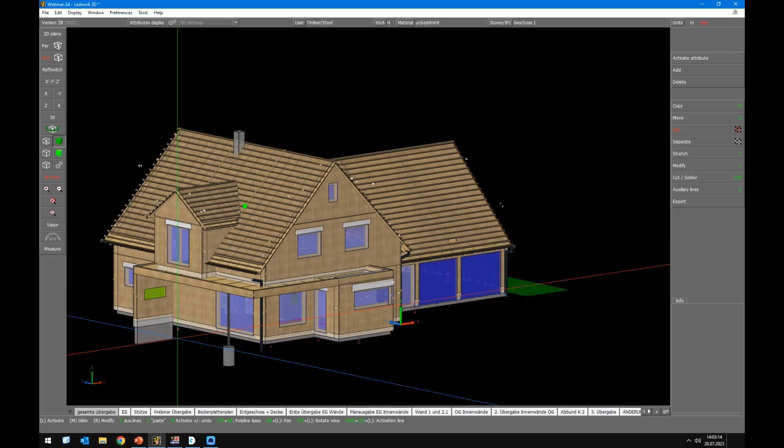Okay, to get an overview, I show you the model in cadwork. This is a single family house, let's check the basement here. It's made of timber frame walls, and here we see the floor, with the bearing beams and floor beams or ceiling beams.

As you can see, the ceiling beams on the real image are supported on these bearing beams, on the down beams, but the architect or building constructor wanted to have the bottom edge of the beams on the same level. So it was decided to lift the beam a bit.

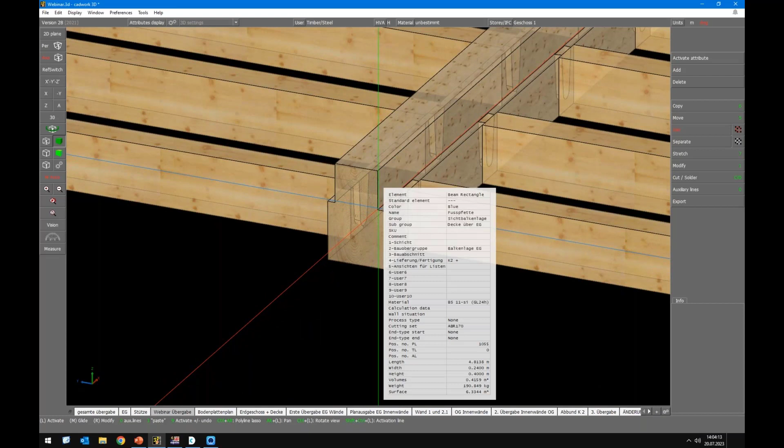You can see it here. So the ceiling beams are connected via dovetail connection, and the bearing beam will be a bit inside the ceiling structure. Otherwise, we would get less stiffness, so it was decided to lift this up a bit. Maybe not so good for acoustic reasons, but the building constructor decided to have it bottom to bottom for floor and bearing beam, for this downstand beam or flush beam, however you call it.

Okay, you can export the file via the IFC interface, for example, or via the DXF interface. We will also be able to export it the old way, what we had in RFEM 5, via the DSTV interface. This will be available soon.

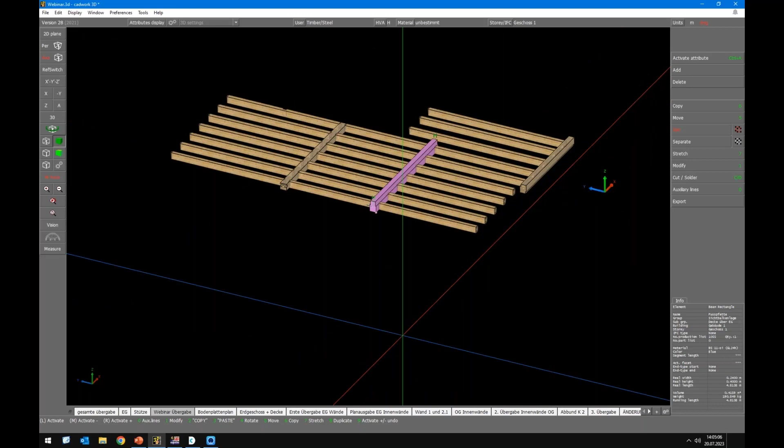But because of time reasons, I will not show you the import or export today. I start directly with a finished model. If you are interested in the import export via the IFC interface, maybe it's worth watching the German webinar done on Tuesday, but because of time, I decided to skip this part in the English one. If you're interested, just check the German one - even when you don't understand the language, you will understand the pictures and how it is done.

Okay, so we have imported all members already, and I have assigned the hinges. So we have 3 one-span beams, and here we have our bearing beams.

We have here the staircase. So let's go back here. There's the staircase here, and that's why we have these cantilevers here. Actually, we have everything finished.

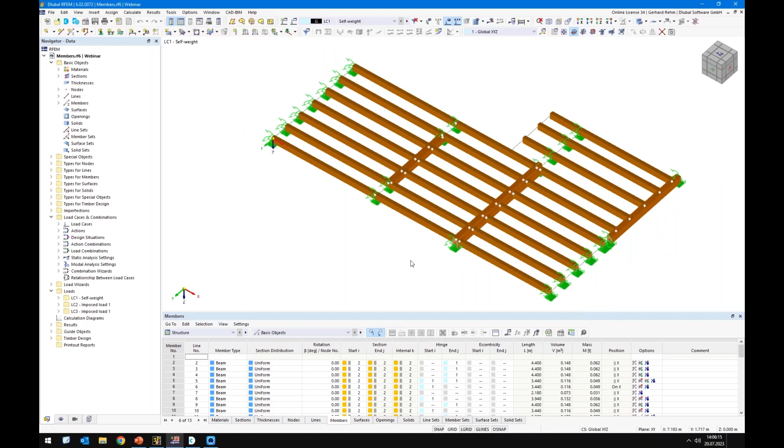I decided to create just one support with a few springs to avoid that the beam rotates around its own axis, so it keeps it simple. I'll switch to the top view, and I have already created 3 load cases: load case 1, load case 2, load case 3.

We will apply the loads now. There are 3 ways to apply loads on these floor beams or ceiling beams. The first is the manual member load. The second is the member load from an area load, and this is what I'll show you today. We will not use it in the end, I'll delete it afterwards, but there's a new feature inside and I want to show it to you.

We apply here 2.5 kilonewton and I will select the geometry by picking these nodes. We simply click OK.

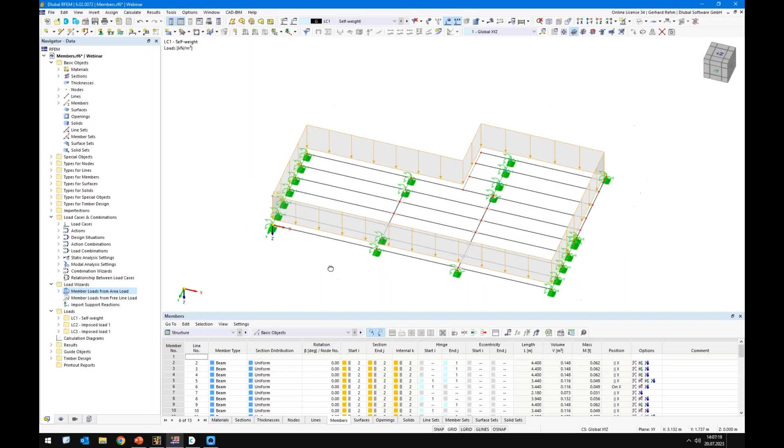Let's start with this view. So this is our area load. When we display it separately, we will see how the loads are distributed to the beams. Let's focus, for example, on this node here. You can see there is this linear distribution and there's this node load.

Sometimes it was hard to understand how the distribution works, or from which tributary area this load comes. Here in the display navigator, under load wizard, you will find this option to display the distribution areas. When you activate it, I'll deactivate the nodal supports for a better overview. When you select the node, you get these colors here, and now you can perfectly see the tributary area. This nodal load or nodal force comes from this area.

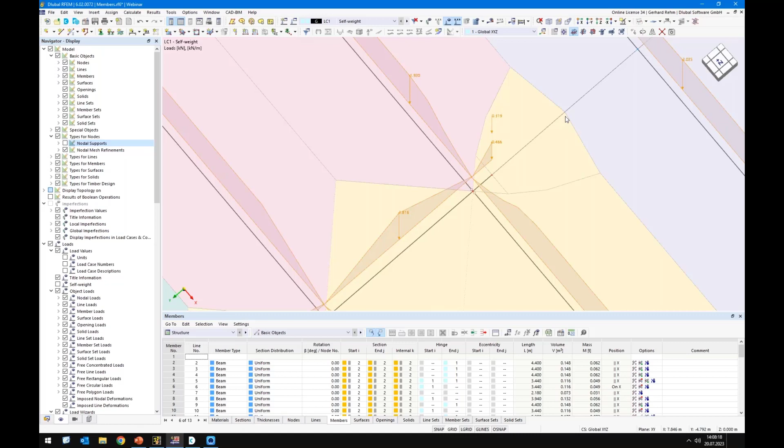In the background you see these Voronoi cells, which are used here for this approach. I guess it's really handy for a better overview and understanding of the approach. Of course, if I go to the load again and say please remove all beams which are parallel to the bearing beams, then we get our typical distribution, what I want to use here now, and also the Voronoi cells.

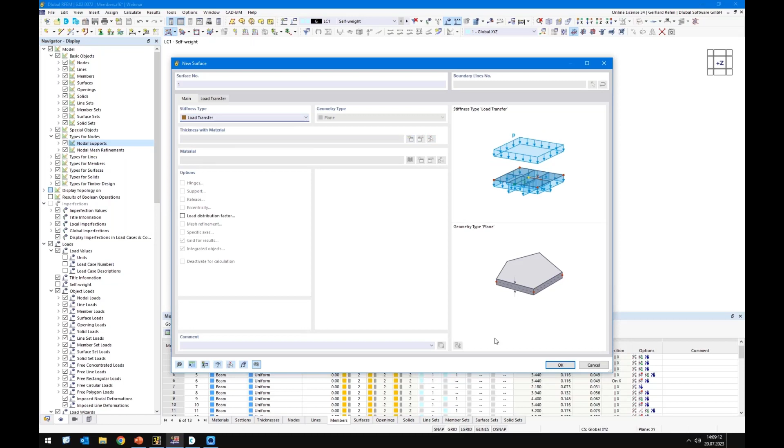But as I mentioned, we don't want to use it here, that's why I delete it, because we want to use the surface, the load transfer surface. This means we will create a new surface by selecting boundary lines, and switch the stiffness type over to load transfer. Now I need to select all these boundary lines.

Let's have a look at the local axis system. Here we go. Reverse local axis system, I want to have it downwards. I was a bit confused. Okay, we see the local y-axis goes parallel to the global y-axis, meaning perpendicular to the ceiling beams.

That's why I'll switch over now in the load transfer to the Y direction. I want to distribute it via the Y direction to all members. As we can see here, we have nodes which will also be loaded, and these nodes are located exactly at this location and this location, same as we had before in this load wizard.

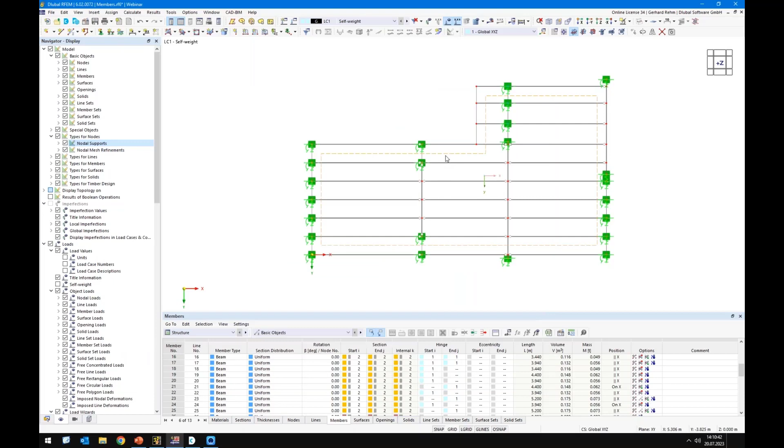That's why I don't want to use it. I copied these numbers and inserted them directly here. Otherwise we would get small node loads at these locations, and I want to avoid that. We can switch off the local axis system again, and now let's load it.

We will apply an additional self-weight of 2.5 kilonewton per square meter, that's from the ceiling structure. When we right-click the surface, we can display it separately, same as for the load wizard. That's actually exactly what I want to see.

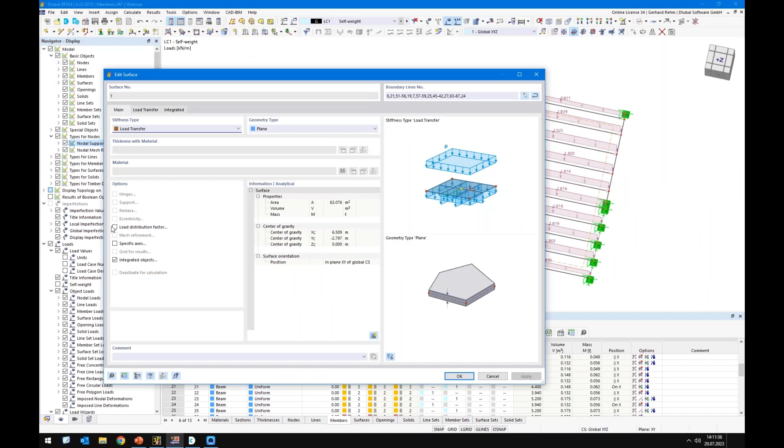But remember there was the staircase here, and on the left and right side we only consider 50% of the load because the surface is only modeled until this location. Of course, I could extend the surface by another 50% of the spacing, but in this case I'll show you another new function called load distribution factor. I activate these factors, and now I can assign to this member, and also to this member, to consider the load by factor 2.

And now when we check it, it's 0.9. When I hit the OK button, it becomes 1.8 again. Okay, that's self-weight. Let's switch over to imposed load.

Here I want to consider it per span because afterwards we want to check continuous floor. We have 3 times a one span beam, and afterwards it will be a continuous beam. That's why I directly loaded with load case 2 on the first and third span, and load case 3 is for the intermediate span. In this case I cannot use surface load because the surface is not divided here on these lines, but I can use free loads, in this case free rectangular loads.

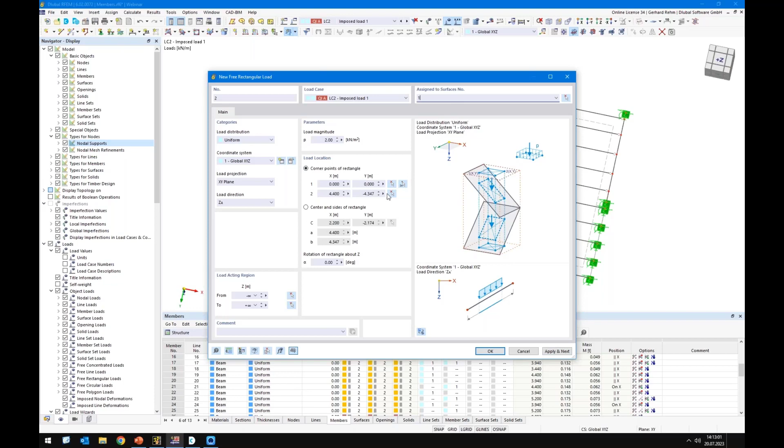So it's for surface 1. And I select the area from here to here. I click apply and next. Of course we need a magnitude, in this case 2 kilonewton per square meter. And again for the third span, to zoom in a bit, here we go, and click OK.

We will see the distributed loads. Switch over to load case 3, and in this case we have this corner, so we cannot use the rectangle load. We will use the free polygon load. I will select the corners. Also 2 kilonewton per square meter on surface 1. Yeah, and that's it.

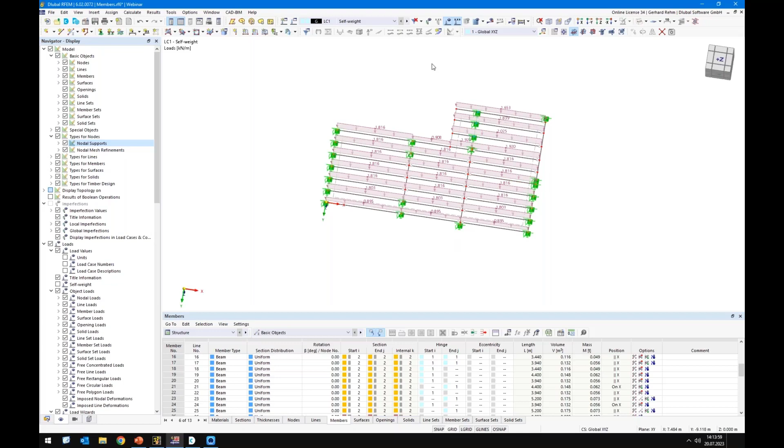Before we start to design the floor, we will check, for plausibility reasons, if everything is correct. So I run the analysis now only for self-weight 1, and let's check the deformation, moment distributions, and so on.

I'm not interested in the nodes and the support reactions. Let's check the deformations first. Maybe colored, it does not matter. So it looks good, and this is exactly what I expect.

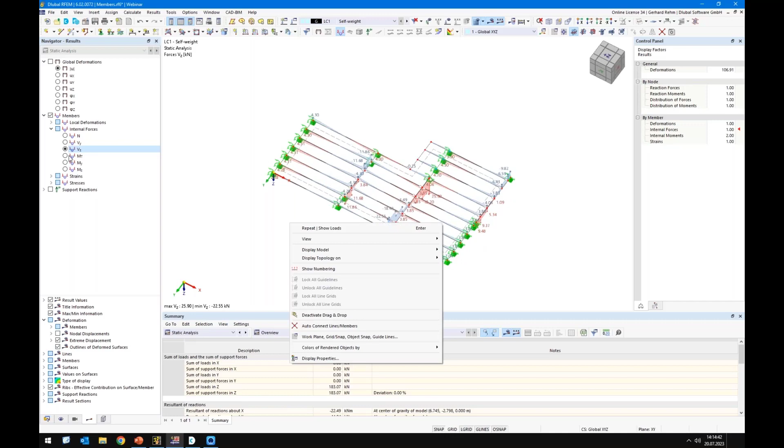Let's switch over to internal forces. We should have no normal forces inside, no shear forces in Y direction, of course in Z direction. That makes sense. And no torsional moments, that's also good. Bending moments look like for every one span beam, that's okay.

Here we have our hogging moment, which is also fine on this cantilever. Okay, looks good so far, and now we can start to think about the design.

Let's check, for example, this floor beam first. So when we come to design, we need to think about, okay, what about stability? Is there any problem with stability? I mean, for this floor, of course not.

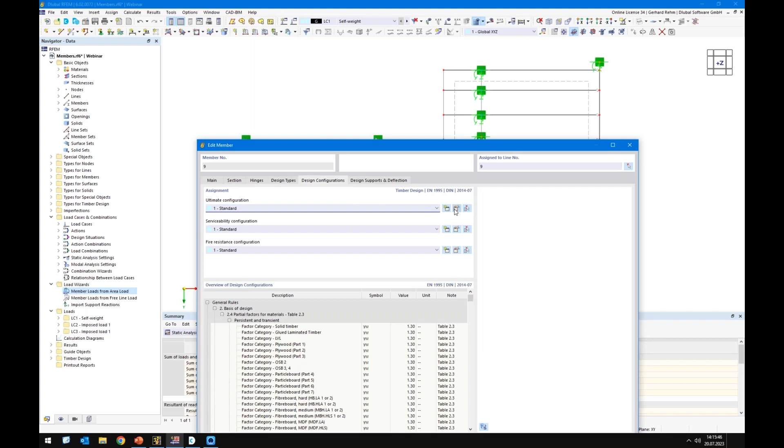We have no normal forces. We have really slender, or non-slender cross sections, so lateral torsional buckling is also not a big deal here. That's why I go to the ultimate config, which is assigned to all members, and I will switch here to do not perform stability analysis, so then I can get rid of the buckling lengths.

For serviceability, it detects the reference lengths like for the member length. In this case 4.40 m, which is okay. So that means I don't have to do anything for the floor beams, but for the downstand beams and also for these beams here and for the cantilever.

Because right now, if I would design this beam as a single member, I would get a reference length of 2.18 m, which is of course not wished. We should use a reference length for the SLS design of, in this case, 3.44 m. And this we do by combining these two members using a member set.

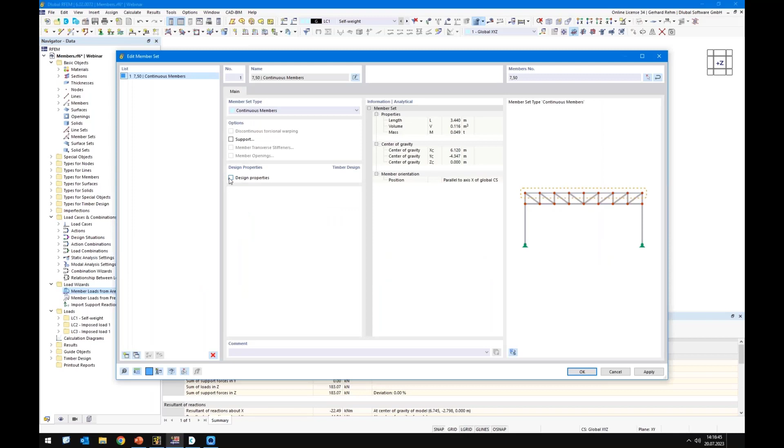I want to overtake the design properties, so the design properties are not on the member anymore, they are now on the member set. When we check the design and deflection tab, we will see now we get a reference length of 3.44 m, which is okay. So we will additionally create member sets for the downstand beams.

In this case I will create also 3 member sets, and for this member set and this member set we will do exactly the same. We activate the design properties. We have a reference length of 2.90 m for one member set and 3.33 m for the other one.

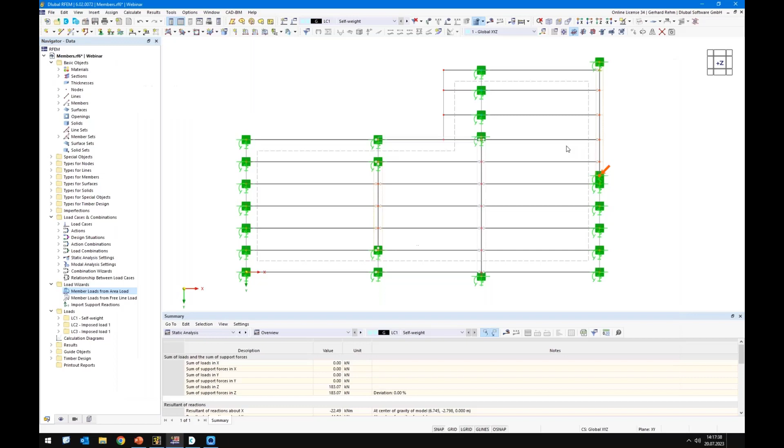Let's have a look on this beam here. Here, of course, we get really high load, and that's why I also add some design supports. So the reference length is still okay for the serviceability check, but I want to check the bearing area, meaning I want to check the compression perpendicular to the grain. That's why we need to create a design support.

So design length is 200 millimeters. And in this case, it's not an inner support, it's an edge support. And the KC90 factor needs to be selected here. In this case, for GLULAM, I select 1.75.

And that's it actually, but I want to mention these two new options, shear reduction and reinforced elements. So the first one is ignoring the shear force in a distance from the support edge, in a distance of member height from the support edge. That means we will use the relevant shear force for the design.

So this is nothing else than we have really high compression perpendicular to the grain inside. That means it increases our shear strength. And that's why it's okay, of course, only when the load comes on from the top side. In this case, I cannot use it because the load actually comes from the bottom side. But if the load comes from the top side, it causes some compression perpendicular inside the beam, and this will help to increase the shear strength.

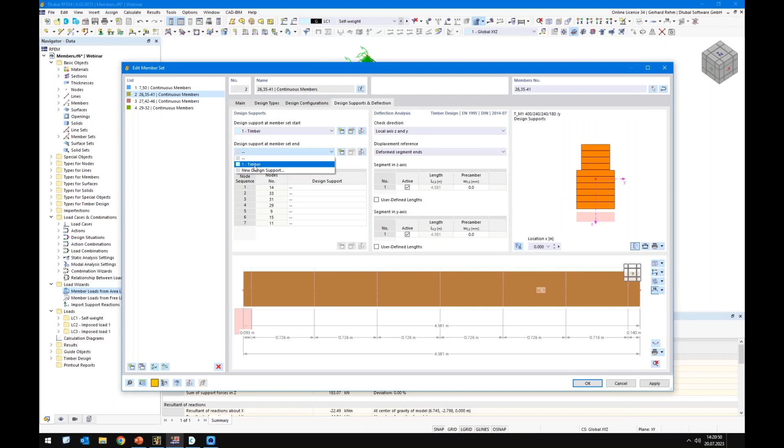Okay, oh, I need to create it, of course. So 200 millimeters and 175, and also at the other side. Okay, that's it.

We need to do the same for the cantilevers here.

So when we check the lengths, the reference lengths, it would be considered with 5.20 meters from member start through member end. Of course, this is not the wished behavior. We want to check this here with a reference length for cantilevers and this for beams.

So in this case, we need to create segments, and segments can be created by using some design supports. In this case, I don't want to check compression perpendicular to the grain. That's why I'll switch from direct support to indirect support, meaning I will switch off the direct support option here.

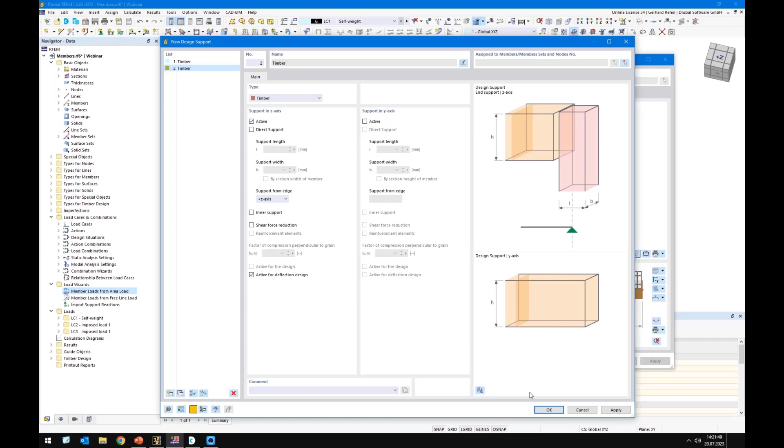Then no design is done for compression perpendicular to the grain, and it detects this tiny node here, and I want to apply it to the intermediate node also, of course, not at the member set start or member start.

Yeah, and now we will see when we check, for example, only the z direction, there's one segment for the cantilever with 1.26 and another segment with 3.94 meters. And these reference lengths are used for the design. And since there is no support here, the program automatically detects that this must be a cantilever.

Okay, good. I think so far that's it. We can run the analysis. Oh yeah, that was the wrong button. I clicked analysis for load case 1 only and not for all.

Oh, maybe good to see that I want to explain something more about the timber design. So we will switch to our timber design. We want to check ULS and SLS. In this case, I guess I have chosen the German annex.

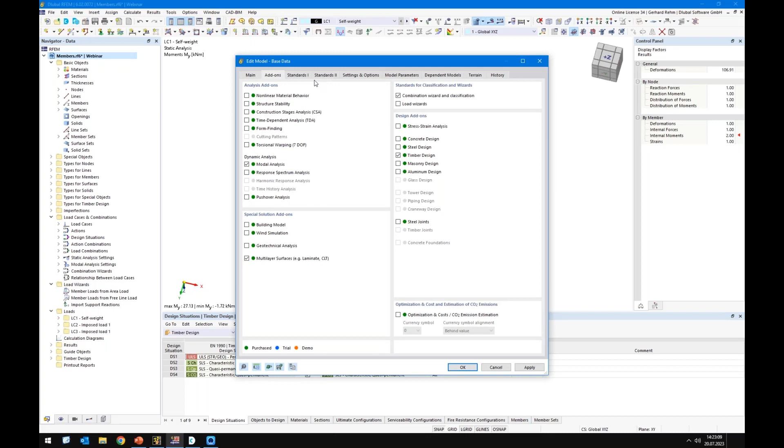I'm not 100% sure now, that's why I check it again. Yeah, it's the German annex, but of course you know you can select your annex according to your country. Okay, so in this case we check ULS, SLS. We have characteristic, quasi-permanent, and a mixture of characteristic, deformation, and the creep parts of the quasi-permanent one.

Objects to design, okay, all member sets and all members, but you see we will get some invalid members. When we select it, we will directly see the invalid members are members without design properties, because the design property is here in the member set.

So to get rid of any warning message at the end of the calculation, I insert here only the list of all members, here of all member sets, and of course the surface, that's a load transfer surface, cannot be designed, that's why I switched it off here as well.

Materials, okay, it was taken over here, GL24h for the glulam beams and the C24 for the ceiling beams. Okay, when we go to sections, we should think about the sections here.

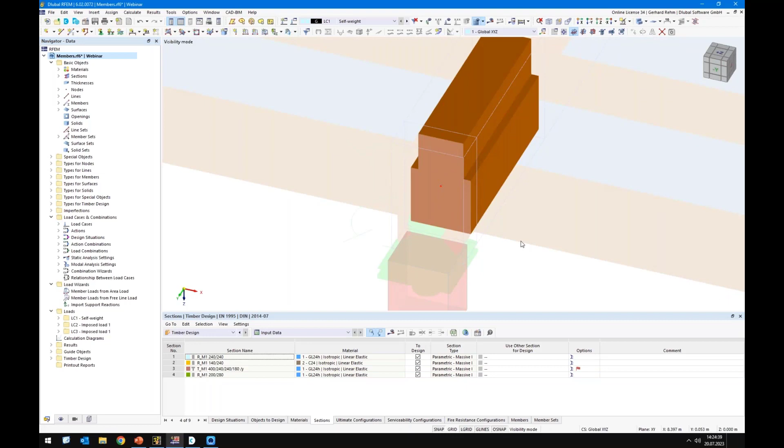Here, this is this inverse T-beam. When we check it in the model, I create a visibility and use this inverse T-beam here. But when we think about the connection, we have these notches here coming from the dovetails.

In this case, it's better not to consider it for the ULS design. For SLS, it's not a big deal because it's reducing the stiffness slightly, but the influence is so small it's not worth discussing. For ULS, however, the influence is significant, and in this case we need to reduce it.

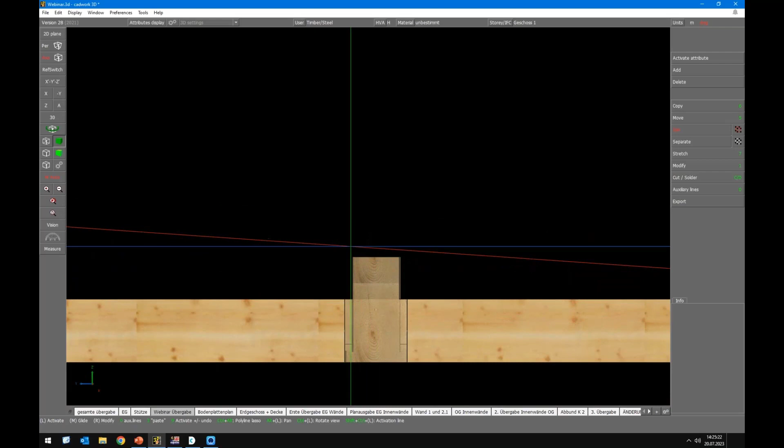That's why I will directly use here a rectangle section, which is 180 by 400. This is from this edge to this edge. We can directly use this by selecting the option use other section for design. So for the left side, it was this one.

240 by 240, and this one is, I guess, 180 millimeters on the top side. Yeah, it doesn't matter, I guess it's the case. 180. Okay, so we click here and replace the 240, the width, with 180. And here I will also use 180 by 400.

Now we have considered the notches as well, and we can be sure that the ULS check is correct. Okay, then let's start the ULS check and the SLS check, of course.

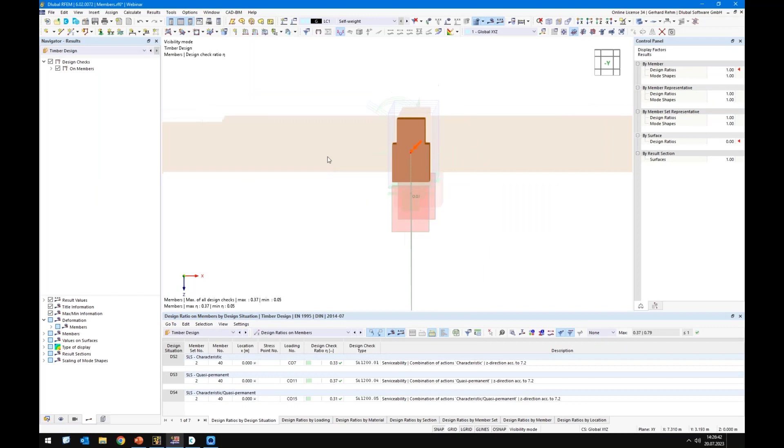Okay, we get the results for our load combinations. Let's cancel the view, and now we see - oh, maybe I forgot something.

Wait a minute, please. I forgot to assign a config to the member sets. Of course, member sets should also have a ULS config. Otherwise, only a serviceability design check is done, and this is what we don't want.

All right, so sorry, I need to run the timber analysis again - of course, not the internal forces, but the timber analysis. Okay, and we see here...

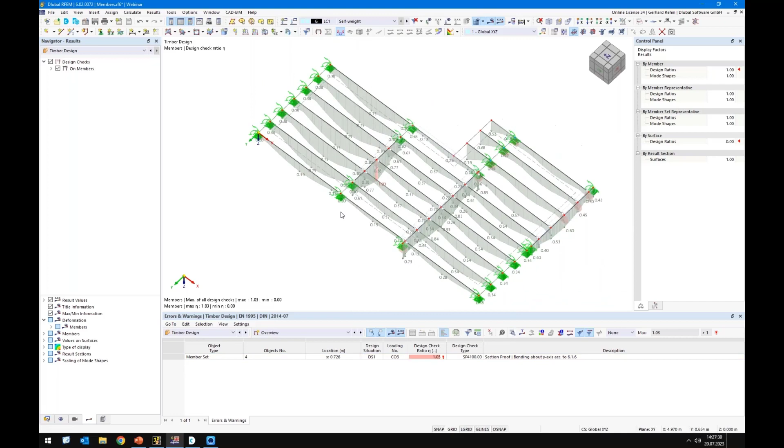Our ratio graphically. We see here on the bottom in the table directly - okay, there is one beam which causes some problems.

Maybe let's start with the ceiling beams. Okay, so we will get the maximum ratio - let's focus on this span here of 75%. We can check it separately for ULS, which is around 60% ratio, and for SLS, it's around 75%. Okay, that's what I expect.

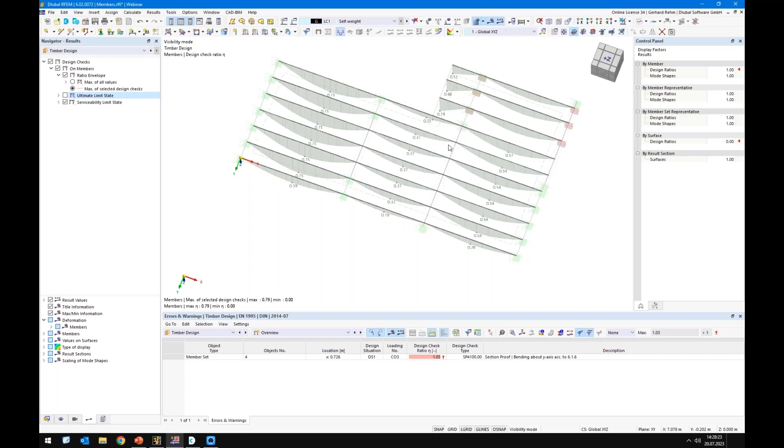We only see the ratio here. The ratio is affine to the deformation. Especially here on the cantilever, you see directly the ratio affine to the deformation. So we can confirm that everything is defined correctly.

All right, maybe let's go to the next object. In this case, let's check this T-beam here in minus X direction.

Okay, and what we see here is a ratio with some jumps. Yeah, of course, the first part from here to here is governed by shear, and from this point to this point, it's deformation or bending, and here shear again.

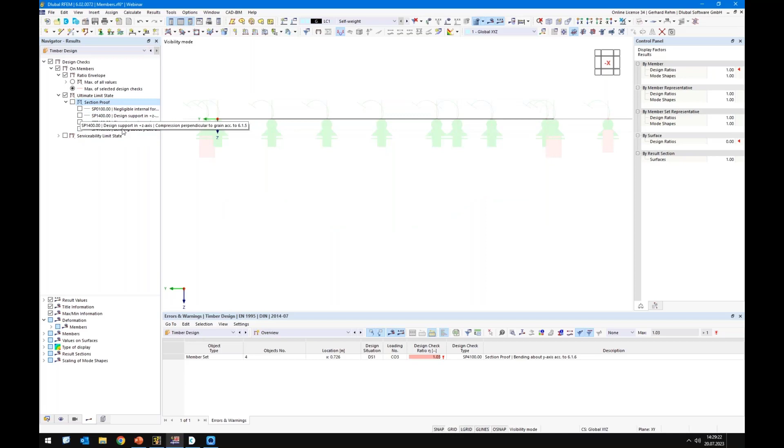But if I'm interested in more detail, I can switch off ULS and all checks, and check it separately. So for example, I want to check only bending, and I get the ratio only for bending, or only for shear - it follows the shear force distribution.

So I also get the ratio at only one X location because of the support bearing resistance. So when we switch to the input and switch to the design ratio on members, we can see - okay, we have compression perpendicular to the grain.

Maybe let's open this design check, and here you can see what is done. You see the whole equation, the whole stuff from the code. We have our support length of 200 millimeters extended by another 30 millimeters. So you can follow every value in detail, or every intermediate value, which helps you to prove your calculation.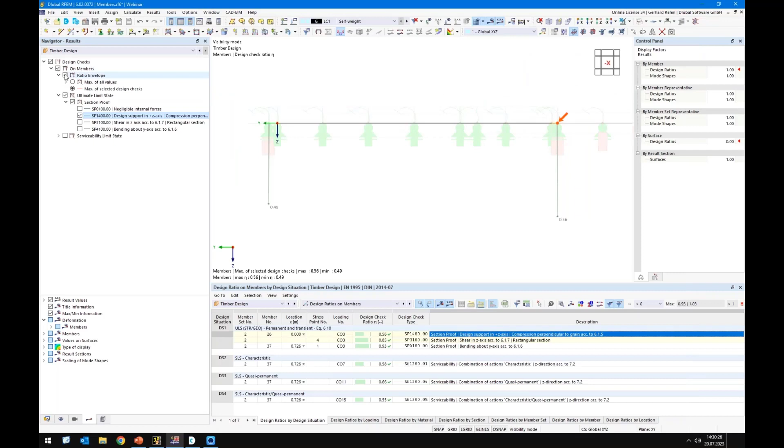Okay, additionally, if you are interested, maybe we can do it in the ULS.

You have the option to deactivate the ratio envelope, and then you will get three different ratios overlapping each other. So the first one is design 1200, 01, 04, 05. Here you can see which ratio it is from which combination.

Okay, let's activate again the max of all design checks, the envelope. We can see here we have a small issue because of bending, but especially on this location, we know it's a small glulam beam with 240 by 240.

And when we know that the reference strength of the EN 14080, the glulam standard, gives us the strength for a reference height of 600 millimeters, so we are far away.

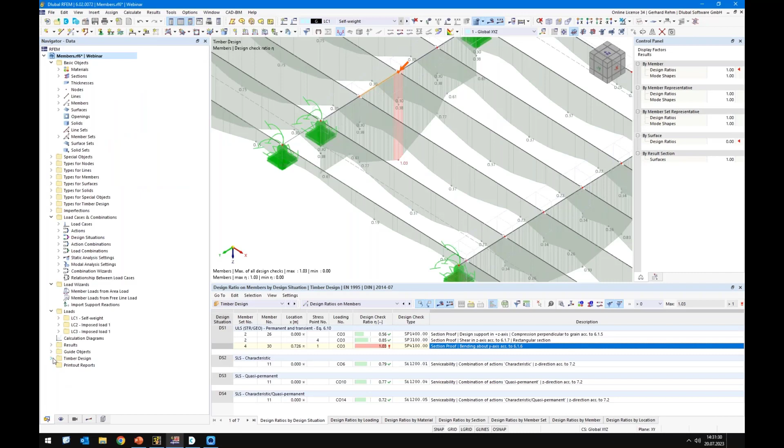That means we can use our KH factor, our size factor, which can be considered here in the ULS config. Here you can activate this KH factor according to Eurocode 5, chapter 3.3. And now we can increase the strength up to 10%, so 24 by 1.1 in this case, because the beam is so small.

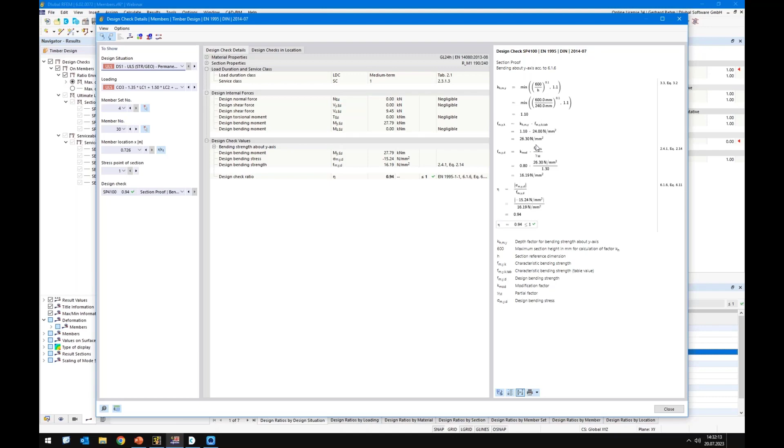Okay, now we get a ratio of only 94%, which comes from bending. Let's have a look inside. Okay, and we will see here, this is the KH factor, and 1.1 by 24 equals 26.3. So actually we have proved the floor, it's okay according to ULS and deformation.

Of course, for floors we need to check vibration too. Yeah, that's a big topic, maybe leading or controlling. For this floor, maybe when we have time at the end, I will show you the vibration design check. If we don't have time, I will refer to our website.

On the website, under support and learning, you will find videos, and here you can search for vibration. When you scroll down, you see this video, and here I show you in detail how you can proceed with the vibration check. Let's see what about the time at the end, and then maybe I can show you something as well. If not, I refer to this video.

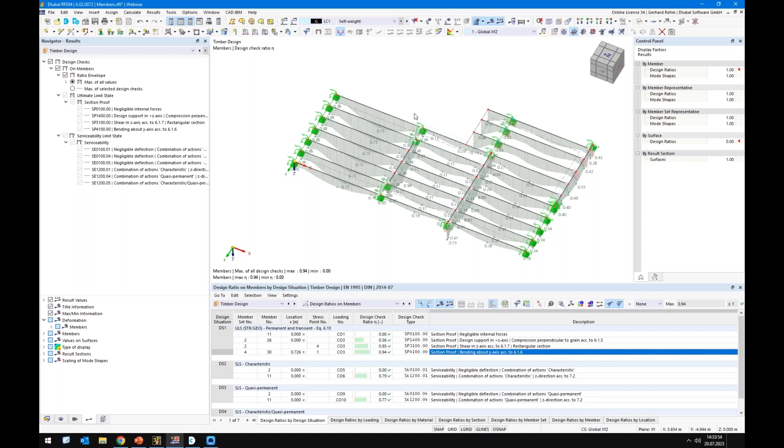Okay, let's say vibration design is fulfilled, and we call the carpenter, for example, and give them the cross sections. On the next day, they call again. The architect or the building contractor called us, and they want to have maybe not a wooden beam ceiling, maybe they want a glulam ceiling, or a cross laminated timber ceiling. That means for us, we have to redo the whole stuff, but of course we want to spend as little time as possible. How can we proceed in this case?

So let's think about glulam floors or cross laminated timber floors. Of course, it would be too uneconomic in this case using one-span beams here. That means in this case we have to use real downstand beams, which are underneath the beams. So we need to think about the cross-section height, especially since we don't have much height in the floor. When we have at least, let's say, 2.50 meters and the downstand beam has already 400, then only 2.10 meters are left.

And of course, this is less. So in this case, we need to keep the downstand beams as small as possible.

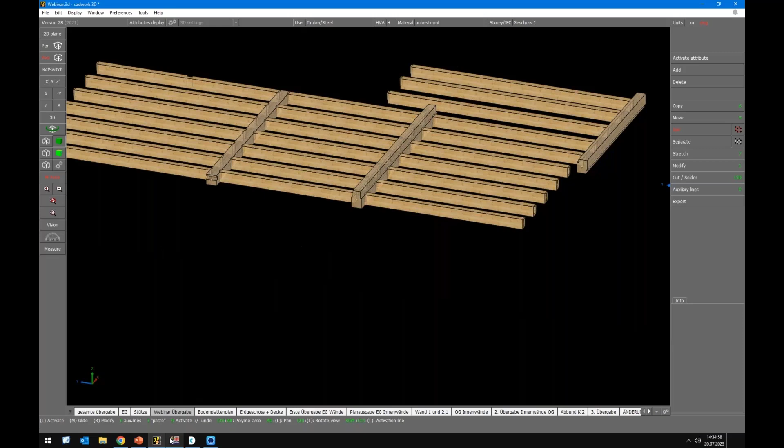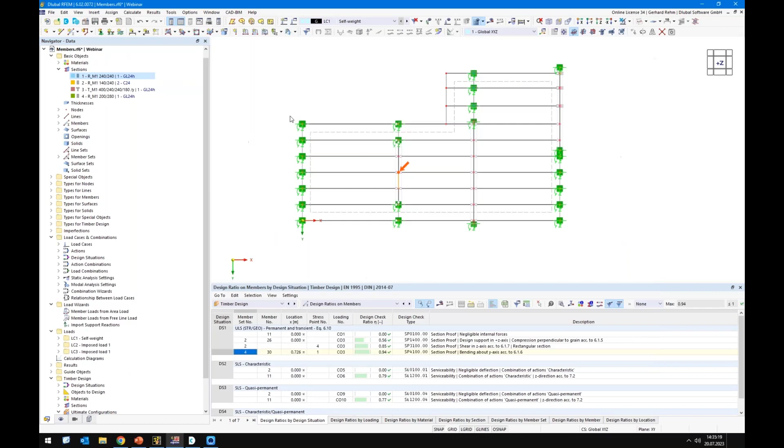So in this case, I want to replace these beams here by, in this case, also timber beams. Of course, you can use steel I-beams as well, that's also possible, but I replace here my sections. Let's start with the left one, 24 by 24. Or let's start with the right one, and here I want to replace it, let's say, by 200 by 280.

And now we come to also a relatively new feature, the LVL design. So now we are able to design also LVL materials. I guess the most famous producers are listed here: Pollmeier with Baubuche, Metsä Kerto, Steico, Stora Enso.

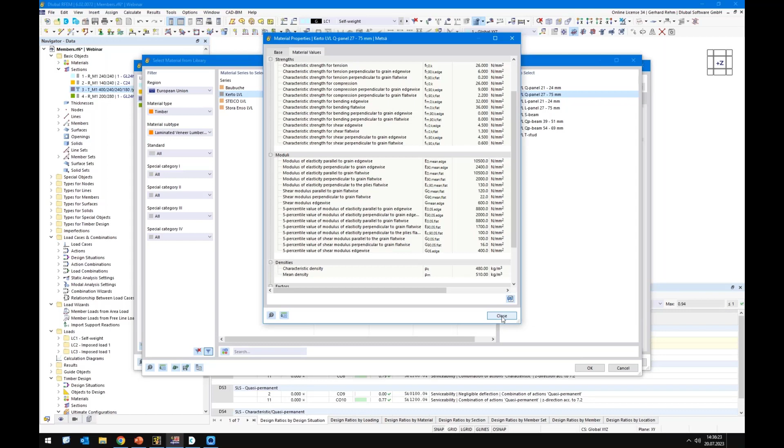And the advantage is it's not only for beams, it's also prepared for surface design. So all values, maybe we can select the Kerto Q panel, because all values are available for this material. You can see all values for stiffness and also for strength are available, and we can do a full design. In this case, we select the Baubuche GL75 beam and click OK.

And now we have to think about, okay, what about the lamellas? Are the lamellas orientated flatwise or edgewise now? Let's go back to the material again. Here we see we use an isotropic linear elastic material model. In this case, we use a flatwise orientation of the lamellas.

Means like this, so this is flatwise. Of course, if we want to use it edgewise, we can flip the member by 90 degrees. This would be an option.

But much better now, we have new material models in RFEM 6 called isotropic timber or orthotropic timber. So when we select isotropic timber and switch to the next tab, we can see, okay, we can switch between parallel and perpendicular, and flatwise and edgewise. For Baubuche, there's not much big difference, only the shear modulus will change when I switch to edgewise.

But when we think about OSB materials, for example, of course they have different stiffness in different directions, and that's actually why this material model was made for. In the past, with RFEM 5, we had to decide if the material is wall stressed or plate stressed.

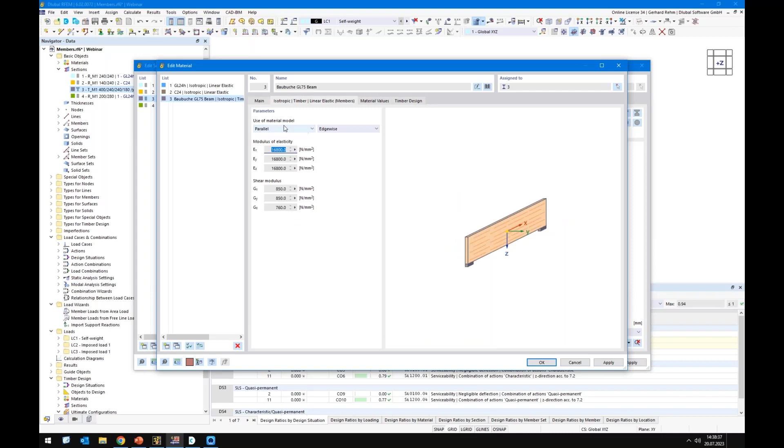Okay, so let's switch this back to isotropic timber, in this case parallel and edgewise. And we will do the same for cross section number 1. We will switch over the material to Baubuche.

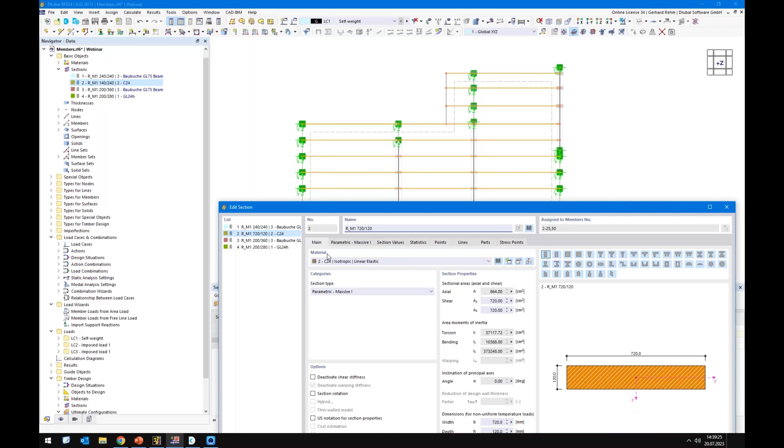And the floor beams, of course, need to be changed as well. For a glulam ceiling, normally we have elements like 60 centimeters or 62 centimeters. In this case, the distance here is around, I guess, 72 centimeters. So for simplification now, I simply switch the floor beam width to 720 millimeters and the height, let's try 120 millimeters. And also we switch to GL24.

Don't mind about the orientation here of the lamellas, this is just a graphical issue.

Okay, when we switch on the rendering, we see, okay, the width fits nearly perfectly here. Maybe not here, the load transfer surface is visible as well, but I mean, it is okay, it's a small error but not relevant to mention. Okay, and of course the continuous effect is a topic.

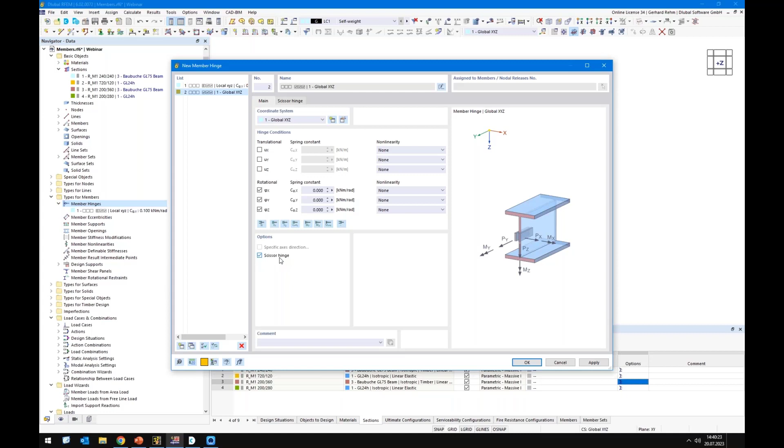So in this case, we will create a new member end hinge. So in this case, we create a so-called scissor hinge for all degrees of freedom, or for all rotational degrees of freedom. And this scissor option causes the effect that no moments are transferred to our downstand beams.

And now I select the option assign to members graphically. And when I select it on the right side and here on the left side, maybe here and here on the left side, and this one, and on the right side, we select OK, and now we have assigned this support, this member hinge, to the continuous members.

Of course, here we have no additional member. We don't need it. Wait, yeah, we can delete it because it's a continuous beam. I will switch off the nodal supports. We can select the hinge and delete the hinge manually.

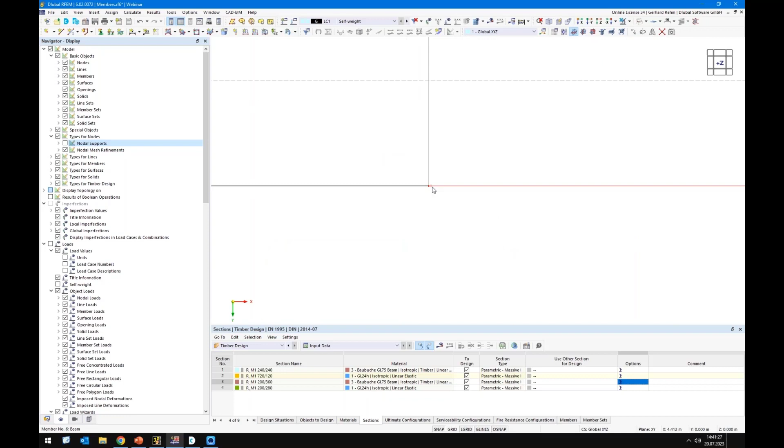Okay, and also here on the bottom we don't need hinges. No, I don't want to select the member, the hinge. Okay, and here it seems I have forgotten the hinge on member start. Okay, looks good, looks good.

Let's double check it again. Check all the yellow colors. Okay, looks good so far. So that's it actually, we have defined everything.

So we can run the calculation again. So that's the easiest way to switch from a floor beam, actually from a wooden beam ceiling to a glulam ceiling.

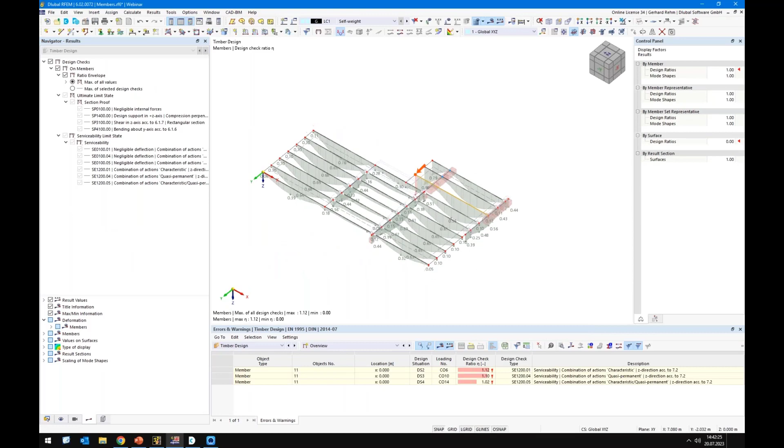So of course we need to recalculate the internal forces, and then we design the members. Okay, so let's check. There is, yeah, okay, in this case, the cantilever, because of the high load here, the cantilevers will be deformed upwards here, and that's why we get this ratio. In this case, I would say I'm not interested in this ratio. You can deactivate the design check here by setting this checkbox to inactive.

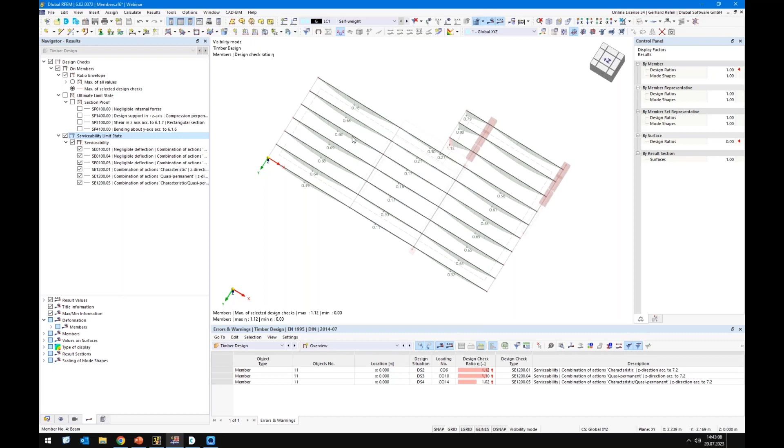All right, but we don't care about that, let's check. We have, for the glulam, a ULS check of around 36% ratio, and for SLS, we have around 70%, 68, 69%. Okay, so let's check also our glulam beams, or our Baubuche beams, sorry.

It was section number 1 and 3. Okay, so we have ratio for SLS of 69 and 62, and ULS, yeah, extremely small. So maybe worth it to talk about changing it to 320 millimeters. So now we have 200 by 360. Then yeah, we can change it to 320, but that's okay for now.

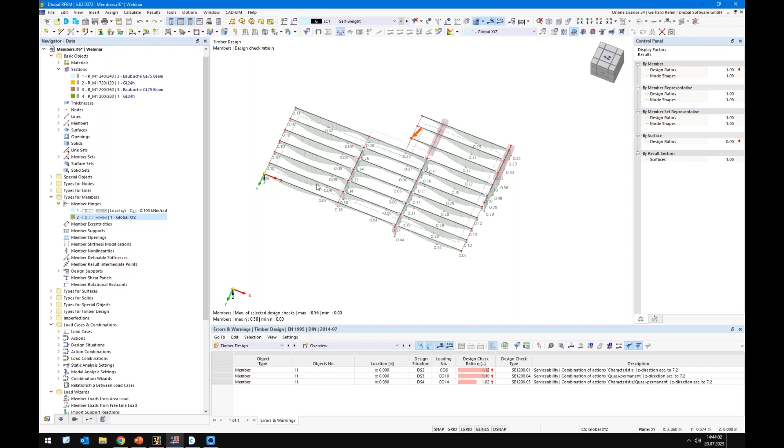Okay, so we remember the ratio. It was around 38 for ULS and 68 for SLS.

But of course, in case you come from scratch, you don't want to model this maybe as a girder. Maybe you want to model it directly with surfaces, and this is also possible.

In this case, we will select our members, our floor members, or maybe we can only hit this button and right click the member, because we don't need it, since I want to consider now the stiffness via a surface.

So that's why I go to edit, and I will switch the beam type now to result beam. This result beam will not bring us additional stiffness. It considers only, or actually, the result beam is just integrating the results from the surface.

Not only the internal forces, but also the deformation. So I create a result beam really small, with a small integration area of 1 millimeter, because to have the deformation clear, I need a width to get something integrated. Okay, that's all.

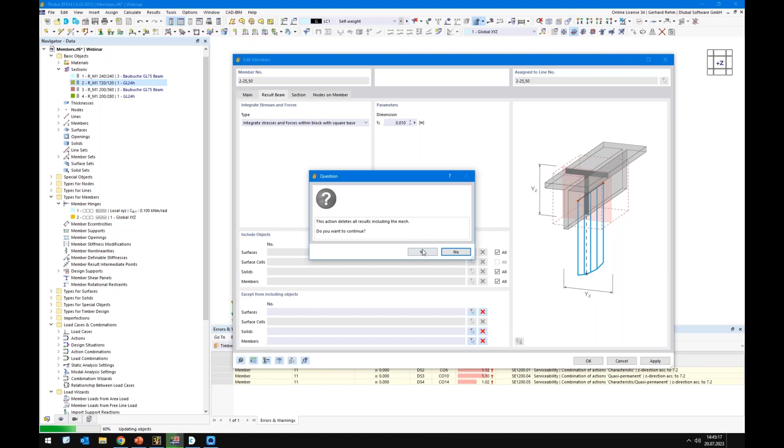All right, then we should focus on that these beams should not have any ULS config, because we don't want to check it against ULS. We want to check it against SLS in this case, because the ULS check will be done by the surface. The reason why I did this, I will explain in a few seconds.

And for the surface, I will switch this to standard. And here we create a new thickness. This thickness will be 120 millimeters. And the material is GL24h, that's correct, but an isotropic material model, which we cannot use for timber, for surfaces and solids. So we create a new one.

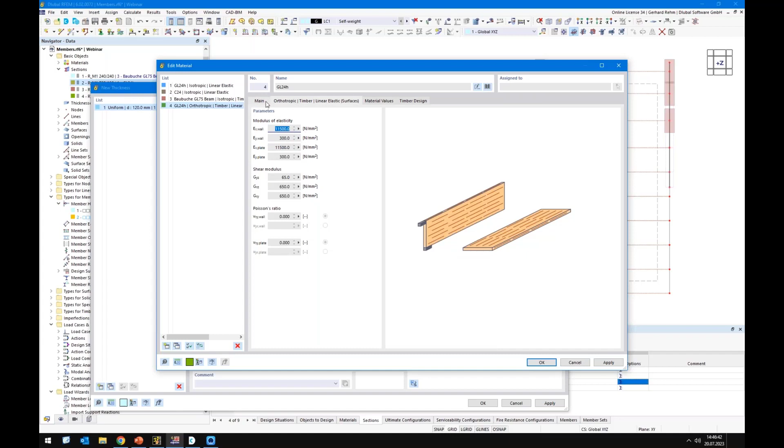So I will copy this material number 1, and now I will switch to orthotropic linear elastic, but I can also switch to orthotropic timber. In case of glulam and softwood, it doesn't matter which one you use, because it's the same. When we switch to orthotropic, you will see we get the same modulus for plate and wall stress. That's why we can also use this one here.

Okay, we see here we have the modulus in X direction and in Y direction, which is EX divided by 30. It should be material 4. Okay, good.

Okay, so now we come to deflection, and that was the reason why I left the beams and converted them to result beams, because here we need to define reference lengths. And since I have defined only one surface, it's hard, because what is the reference length? And I want to consider the deformed system, not the undeformed system.

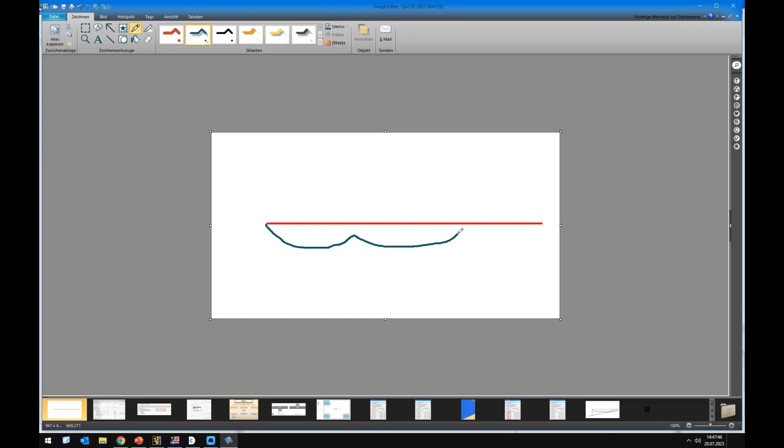So to make it more clear, I will create this small sketch. So when this is our floor, and let's say this is our deformation, this is the downstand beam 1, downstand beam 2, and this is the edge.

Okay, so what we want to check is the deformation related to the shifted FE nodes. And this is of course hard for the program to determine. We have options here for undeformed system, which I don't want to use. I want to use the deformed system.

We can define a reference plane according to the maximum or minimum point, or a user-defined one. So when we think about if I want to check the deformation here, and I define a user-defined plane, for example like this, you can imagine what happens to the deformation here. They will be absolutely wrong.

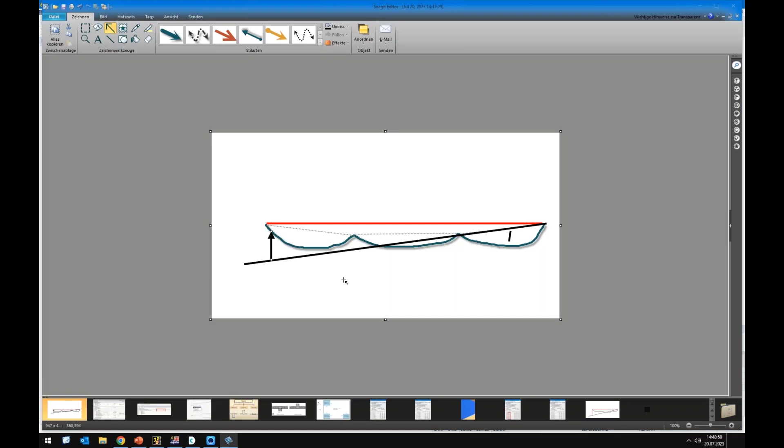Sorry, till here. So that's why it's better in this case to use these downstand beams. In case of rigid supports, it's not a big deal, there's no difference. But in case of semi-rigid supports, it's better to prove it with result beams. Okay, that is why I switch on the config here, and I will switch off serviceability here.

Okay, that's it. Now we will switch over again to objects to design, and in this case I want to design surface number 1. All right.

300. So there are a few options now. We can either create a user-defined material and override it by maybe 1 Newton per square millimeter, to have no stiffness in the Y direction.

That is one option. Of course, the second option would be to create multiple surfaces for each beam, which is really time consuming, and the effort is actually less, or there is no effort. The third option would be to modify the stiffness matrix for the surface.

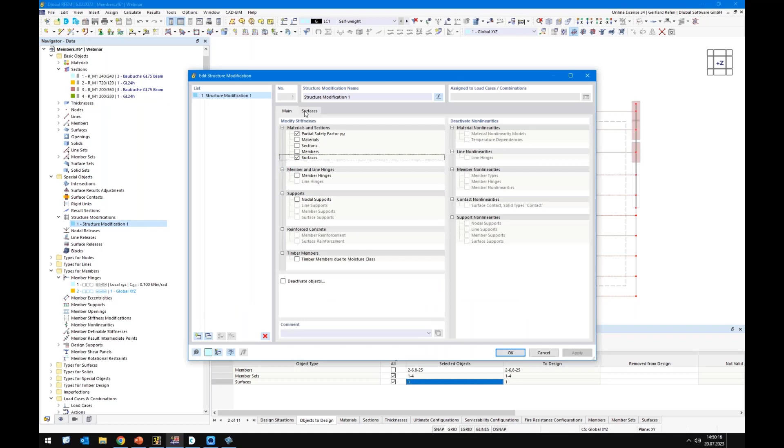So when we check special objects, structure modification, we can create a new structure modification, where we reduce the stiffness matrix element D22, which is the stiffness in y direction, and the torsional stiffness. We can set this to a factor of 0.001, for example. But it's so minor that's why I'll skip it and not consider it in this case.

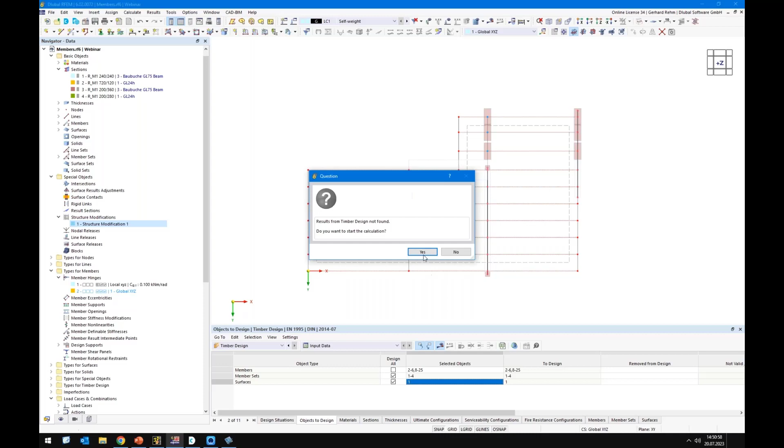Okay, maybe best to save the file. And now we can run the analysis. So in this case, we get member results for ULS, for SLS, and we get the ULS design for the surface. Of course, we need to recalculate all internal forces again, and afterwards we will do the timber design.

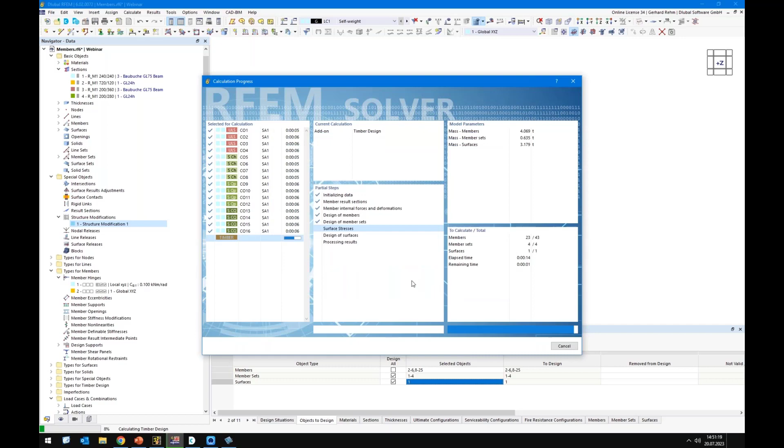Okay, we can go on with features which will be released in the near future.

The first important one is the fire resistance design for initially protected and unprotected surfaces. There was always this problem that it was available for members but not for surfaces, and we are close to finishing this feature. We can offer fire design also for surfaces, meaning also for cross-laminated timber.

Just need to click yes to recover the file. Oh, not okay. Let's check if everything is available. Fortunately, I saved the file.

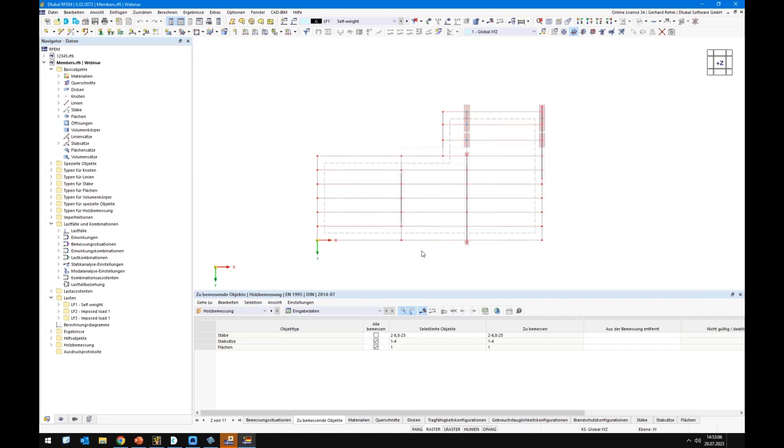Where is it? Members, okay. Let's run the analysis again. Hopefully it works now. I have no idea what's going on, but it's working okay. Good.

My first mistake was not checking the mesh size. In this case, the default value of 0.5 meter is used. Maybe better to adjust it to 0.25 meters. Okay, let's run the analysis again.

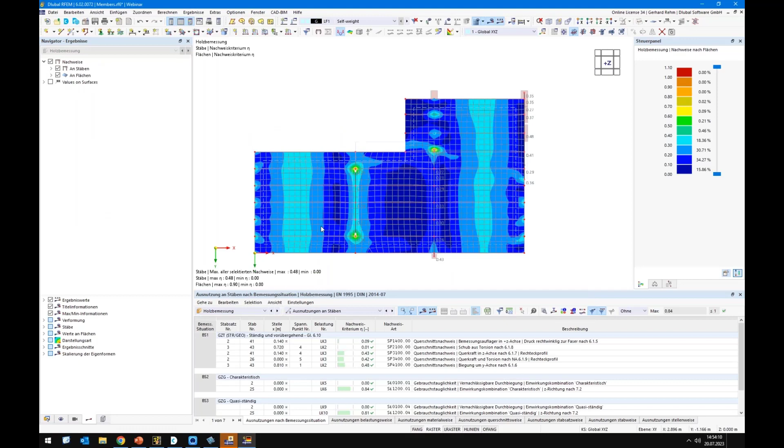Okay, so maybe focus first on the member design. Of course, you will see the ratio of the downstand beams, but we don't care about the downstand beams now. We are interested in...

Oh, sorry, it's in German. Oh my God, sorry, it's in the German interface now. I started the wrong version. Come on. Sorry. I need to open the English interface, of course. My bad.

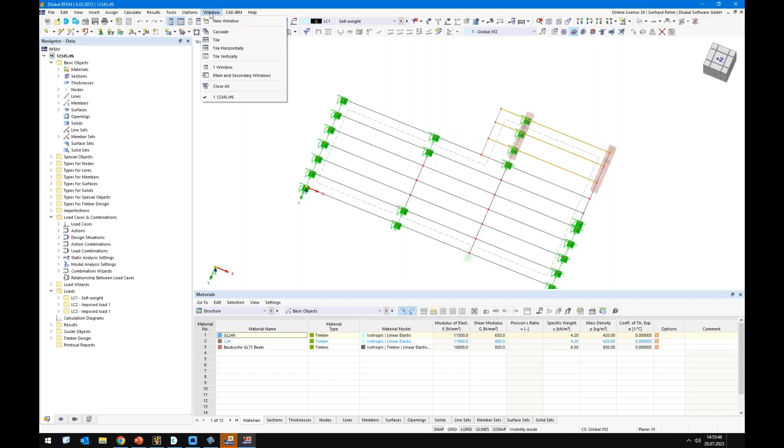Let's go back to our RFEM. Okay, this is the wrong file, I need to open... Members, here we go. So now we lost a few minutes. I'm sorry for that.

Okay, so we have to change the mesh size to 0.25. Okay, and now let's rerun the analysis again.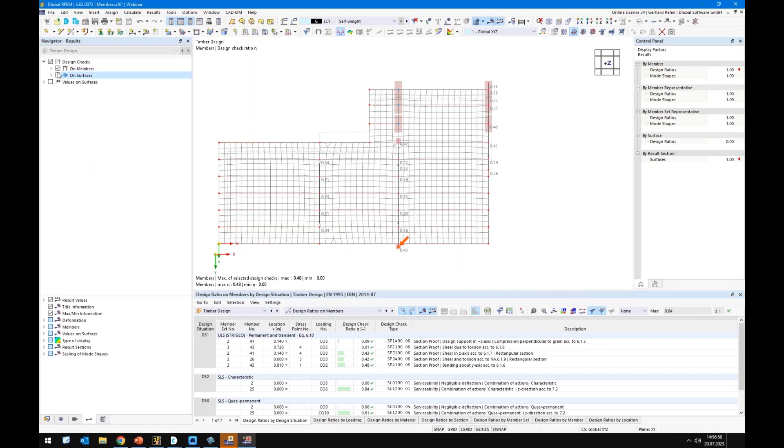Okay, so switch on the surface results again, and we will switch over to the SLS ratio. Okay, we'll switch the image off. Okay, so using the surface results.

So now we have integrated the results from the surface to this result beam, and we have designed this result beam according to SLS, and the ratio is the same as for the member design. So this is what I want to show you. When we switch on the results for the surface, we hopefully get similar results. The ratio here was around 38%, so we have nearly the same on this hogging bending moment, which is controlling in this case.

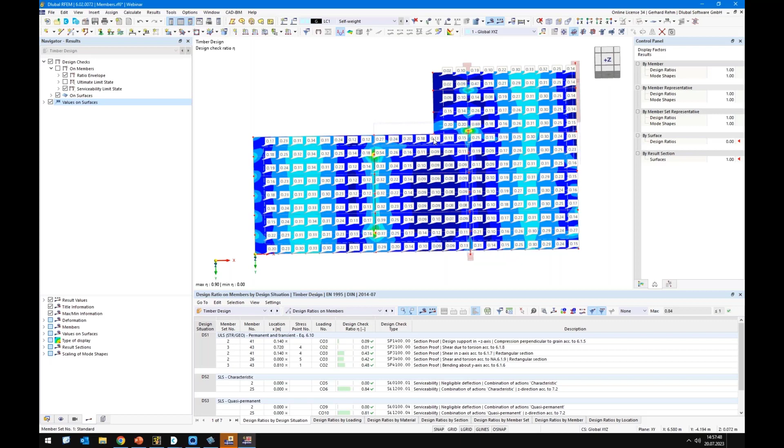So it is up to you if you prefer using members or better to create directly a surface. Additionally, we can design cross-laminated timber here as well. In this case, we need to create a new thickness as well.

Or maybe it would be nice to support also the lines, because you see here the singularities, since I have not replaced the nodal supports by the line supports. That's why we get the singularities, so it's better to use line hinges in this case. But for now, it's good.

We lost already a lot of time because of this issue.

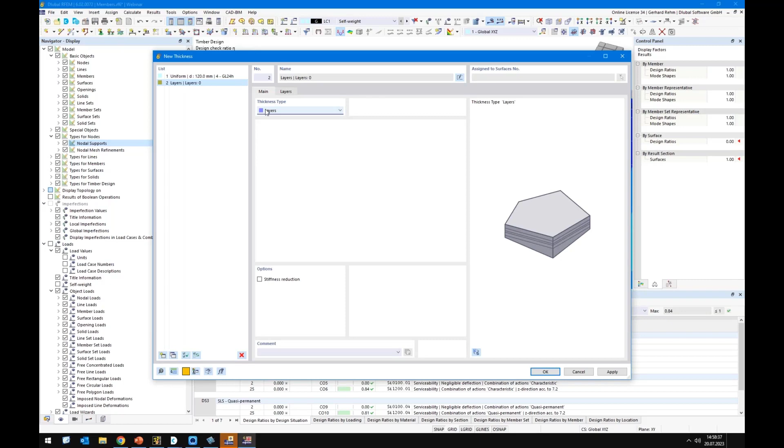Okay, so when you want to design a cross-laminated timber, we create a new thickness in this case, and we will switch to layers here. This is only available if the layer add-on is activated in the base data. And here we can directly select our composition, for example, from Binderholz, a 5-layered 120 millimeter, and then we can compare the ratio from the glulam to the cross-laminated timber.

Okay, I mean, this is maybe not. Well, maybe we can run the analysis. It doesn't matter, so we have replaced it.

We can check the orientations again for this surface in X and Y direction. So layer 1, 3, and 5 goes in this direction, and layer 2 and 4 in this direction. So it's okay. Here it's the same because of the bending moment. Of course, the elements are larger.

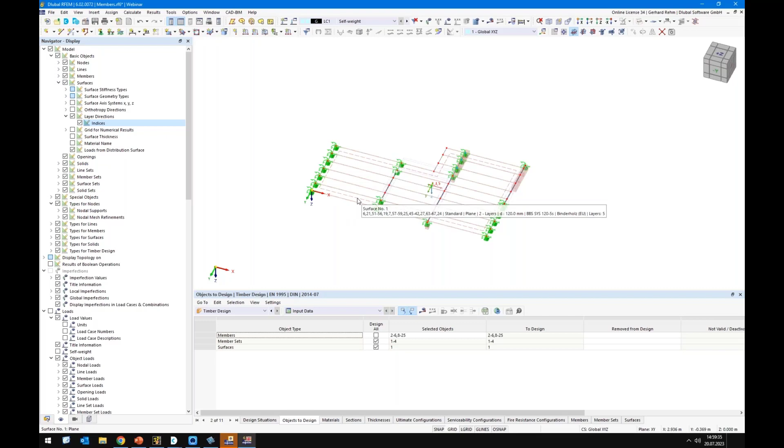Maybe it's worth it to model the surface, to split the model at every, in this case, 125 centimeters, and add a line hinge in between. So for simplification, I leave this for now.

And we can also compare the result here. But of course, we have to be aware of singularities because of these nodal supports, which will be more of interest for the CLT design compared to the glulam design.

Of course, the design takes a bit longer than the normal surface because we have much more results. We have 5 layers, with results on top, bottom, and on the intermediate side. That's why it takes a bit longer.

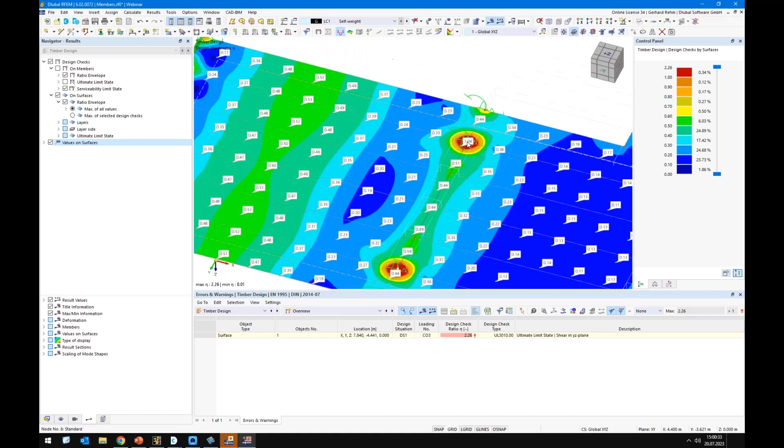Okay, so let's check the values on surfaces also for the envelope. And here the ratio is, we have a problem. I'm sure this is because of the rolling shear and this singularity. This needs to be analyzed a bit more in detail. We have no time for that today, but in general, it looks okay with 50% ratio for ULS, and for SLS we have around 85-90%, which is also okay.

Okay, that's actually about this design of the floor.

And I told you we will come to this load transfer to the other model. We reached the next step in this development. So I want to show you how to transfer the load from this nodal support and this nodal support to the columns. As we see here, of course, the beams are supported by some columns.

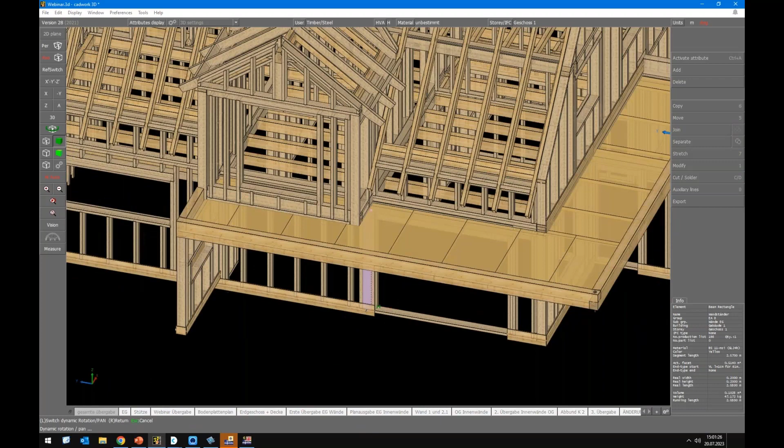And also here we have some installations which need to be considered maybe, and this needs to be checked.

In this case, I have prepared already a model with 2 columns, and now we want to design these columns by taking over the support reactions from the first file.

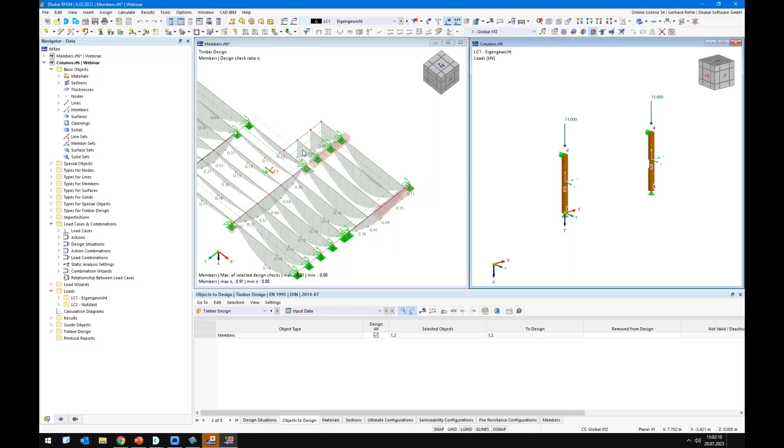Okay, we have here the 2 columns, and these 2 columns already have some loads from the first story, and now we want to add the loads from these nodes here. We need to switch on the numbering in this case.

Nodes with support and numbering. So it's numbering 52 and 51, and we want to apply load from 52 to node 2 and from 51 to node number 4. And here we can use the new object called import support reactions.

So here we see this model, members, which is also connected. I'm not sure if I saved it. Hopefully I saved it. Let's see. Members.

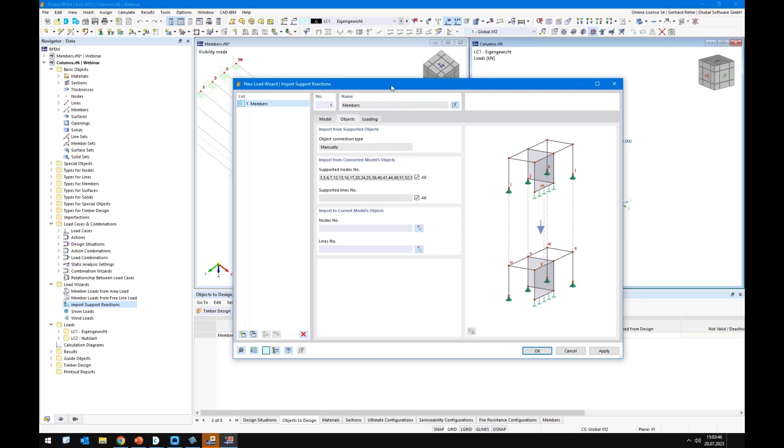And here we come to the next tab, objects. So the first option is manually, that means we have to take over the values manually or connect the values manually. There will be a new option, automatically, in the future, where it detects automatically the nodes based on the location. In this case, I have modeled it independently of the location, so therefore I have to connect it manually either way.

Okay, so we deactivate here all nodes and we add node number 52 and 51. And here we want to have 2 and 4.

Loading, we can take over the loads from multiple load cases. So we have here 2 load cases, meaning we have actually 3 load cases, and we will add this load from load case 3 also to load case 2.

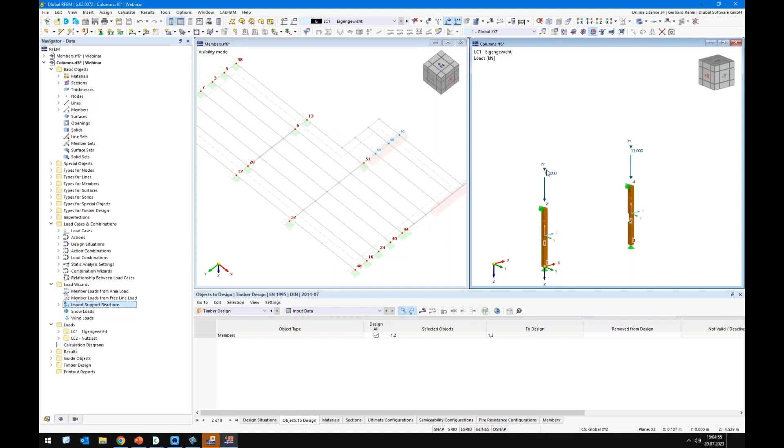So we see we can select the direction, only forces in Z direction or Y or X, and also the rotational degrees of freedom can be taken over. Okay, I click the OK button and I will see here, okay, there's a question mark because this file knows only what it has to look inside this file, but this happens only in case you calculate the file.

Okay, that means I will click the Calculate All button. Now it searches for loads or support reactions inside the original file, and it will realize there is no result available.

It will calculate automatically the load cases and load combinations. And when this is done, we will see the value change from a question mark to a real value. And now it starts to calculate the column model. I have set only 2 load cases and only ULS in this case.

Okay, so we see this load has the activated option 'imported support reaction', so we cannot change it. And we can check load case 2, and here we have the 2 load cases. Yeah, and this is how it works to import the support reactions from another file.

What happens now when we, for example, add another load to the original model? So I will apply another load here, and you see here the loads are still available.

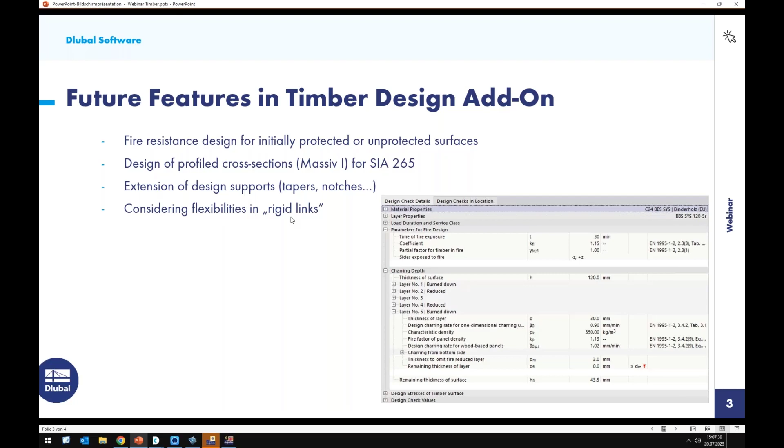So we will consider slip, or actually line hinges, in the rigid links in the future. It's not directly based on the Timber add-on, but of course in Timber design we consider a lot of stuff not as rigid but semi-rigid, and in the future this will be available.